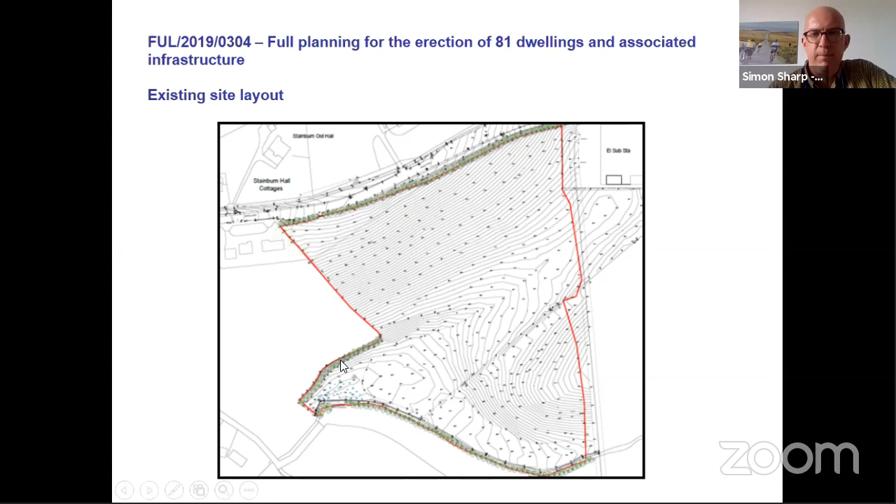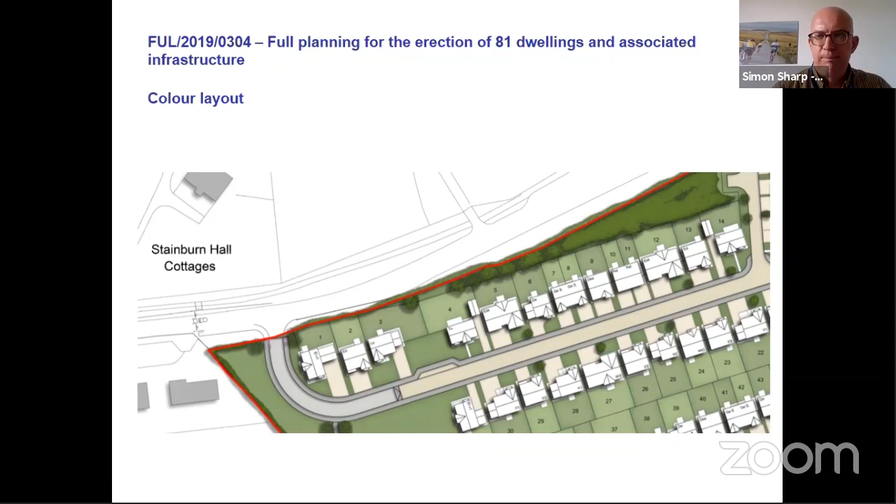I've just zoomed in to the frontage so members can get a better idea of these access arrangements, the vehicular access at the western end of the frontage. And there you can see the hedge and the enhancement of that area, the fillet of further landscaping. You can obviously come back to these slides if members wish at any point during the consideration of the application.

So obviously section 106, the recommendation refers to off-site infrastructure works, quite limited off-site infrastructure works, to enable a 40-mile-an-hour limit to be provided.

This is the hatched area, extending eastwards towards Great Clifton. The one other point members will see from this plan is the green line. It's very faint, but it follows where my cursor is, the visibility splays. These are the visibility splays required to meet the county standards. And of note, because of the curvature of the road and the verge, this means that, with the exception of a small stretch, the vast majority of the frontage hedge will be retained, because the visibility splay quickly comes onto the verge and then out into the roadway itself.

I know members will be familiar, we've had quite a few discussions with regard to the site at Thursby, and also the site last time out at Blencogo, where there was a lot of hedge coming out to enable the visibility splays to be implemented. That's not the case here, so it's materially different to Blencogo in that respect.

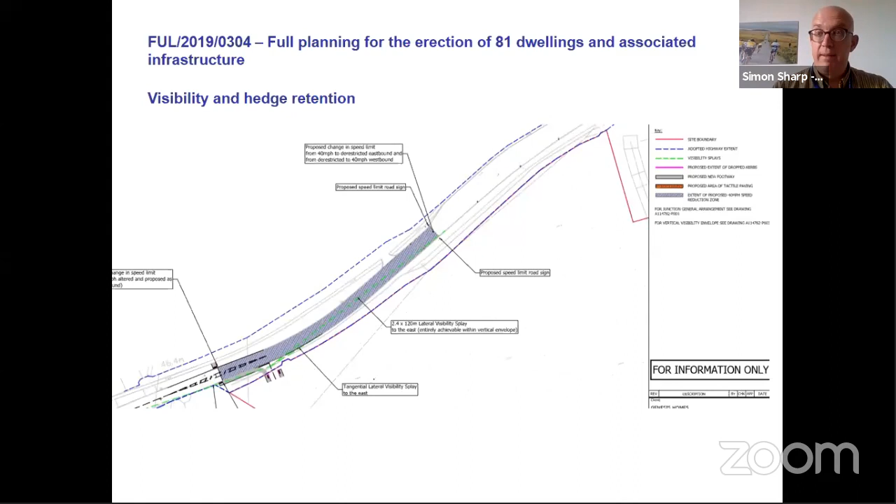I've just zoomed out now just to show the extent of this green, blue hatching, to show the extent of this new 40-mile-an-hour limit along the site frontage. This is the electricity installation to give you some idea of the extent required by the County Highways Authority. And of course, with the 40-mile-an-hour limit in place, that informs the visibility splays required.

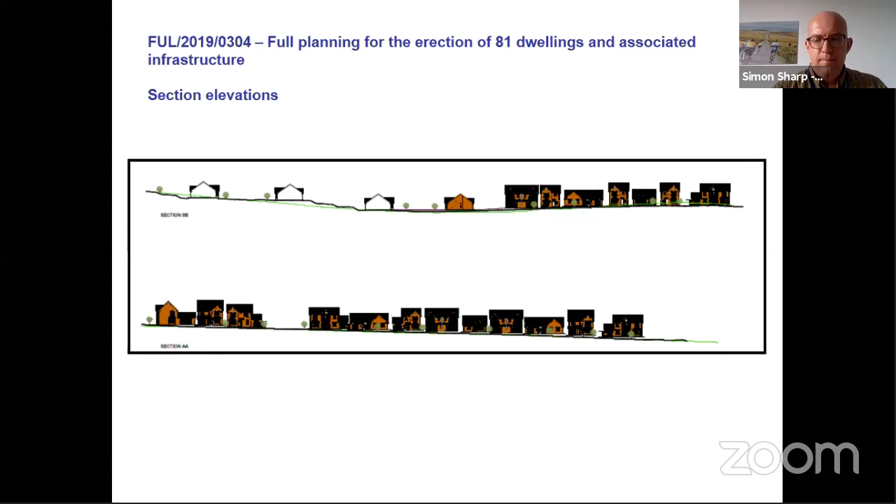You can also see how bungalows are being proposed as well in this plan. We'll zoom in on a section in a moment. So this will give an idea of how those streetscapes will form. You can see how the roof lines are varied, how the eaves lines are varied, how the massing is varied.

So, albeit in plan view, at first sight, you can see where the Town Council's comments about the serried ranks may be coming from. On greater examination, you can actually see what relief is provided by introducing different house types and the topography across the site.

As referred to in the officer's report, there's obviously quite a substantial variety of dwellings being proposed here: 2, 3 and 4 beds, semi-detached, detached, bungalows, two-storey houses. So it's quite a breadth, and that's obviously going to foster quite a balanced and mixed community of different sizes of family households, different age groups, etc., which is obviously good for the sustainability of a development.

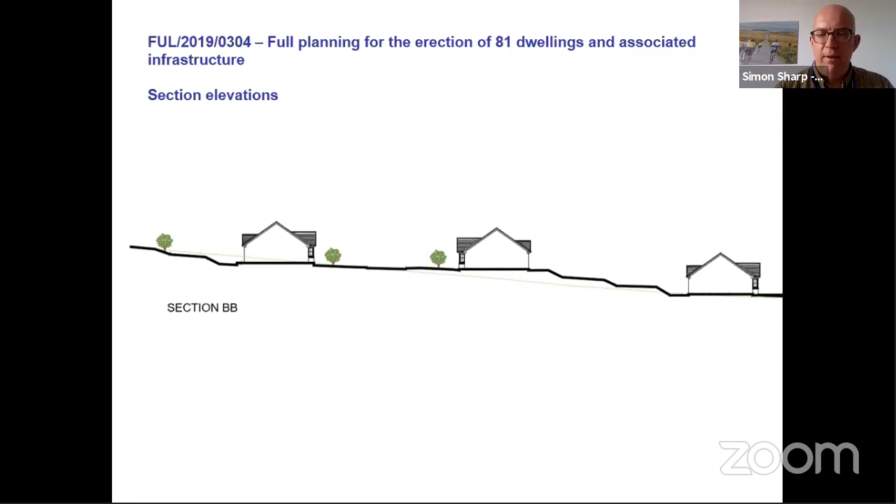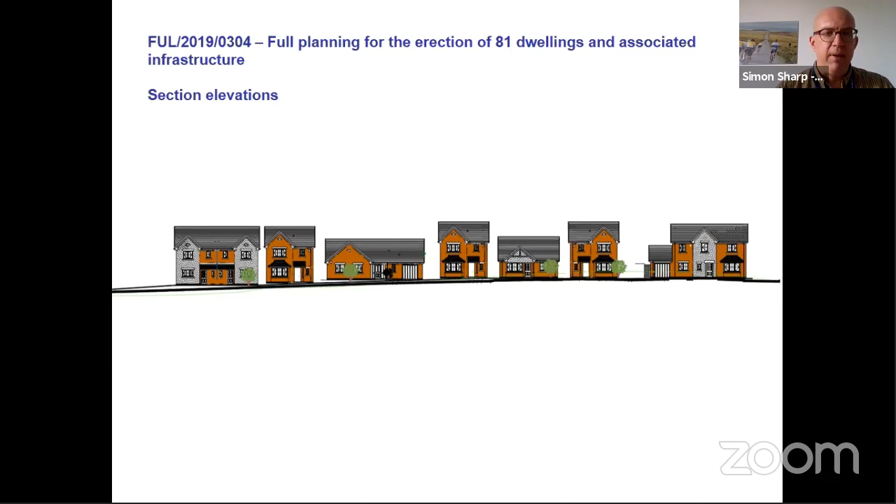And this is another example of how those roofscapes and roof lines vary. So just a canter through the different dwelling types - you can see this is a bungalow. So what we're picking up here is traditional gabled forms.

Now, this is not a modernist development. It's not pushing the architectural boundaries. It's referencing the gabled forms that exist in Stainburn. And as we've referred to in the officer's report, it's quite an eclectic mix of dwelling types and materials in Stainburn. There's render, rough cast render, there's brick, there's stone, there's red brick, there's buff brick.

There's quite an eclectic mix of house styles. There is a particular quality of houses in Stainburn. Members are familiar with Stainburn, particularly the interwar houses that line the main thoroughfare through - classic low density, mature landscaped interwar ribbon development of particular high quality. So there's something really to reference there, and this will obviously become, if it gets granted, a new settlement edge, and you need to think very carefully about how this gateway to Stainburn will appear when coming from the Great Clifton direction.

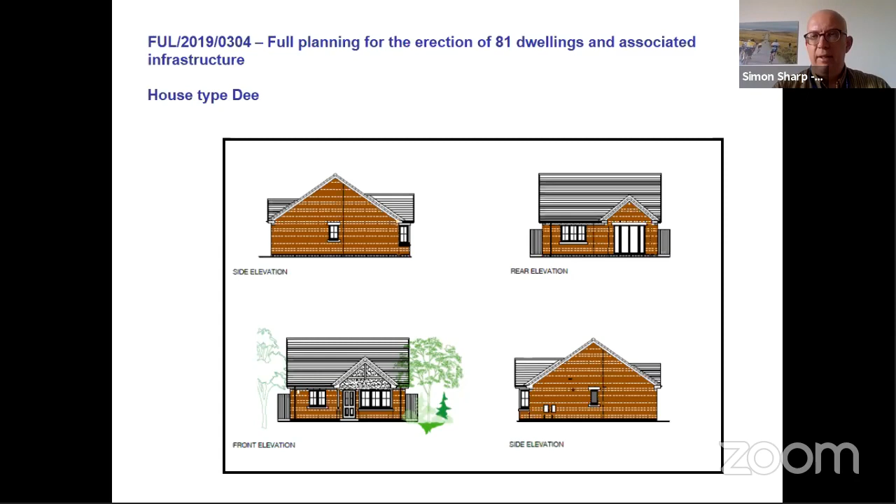So just punching through again, you can see these gabled house type forms, bay windows, canopies, casement windows. You can see variation of materials on some of these dwellings, with a mix of materials.

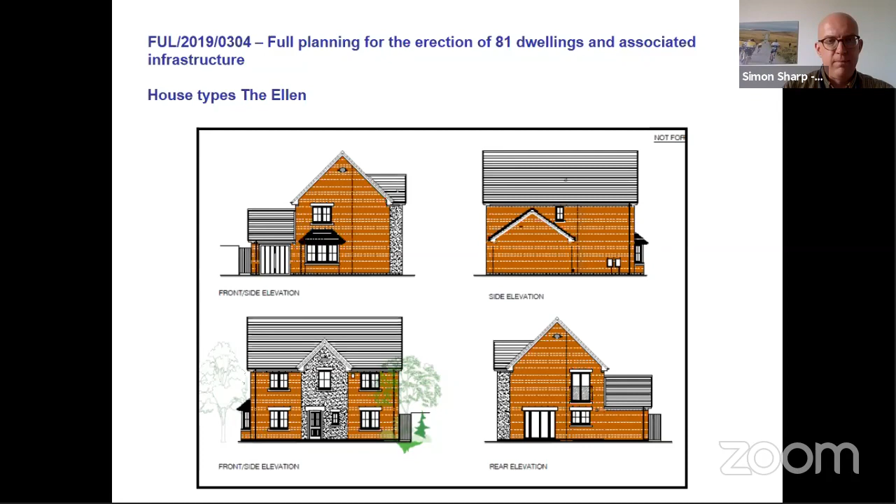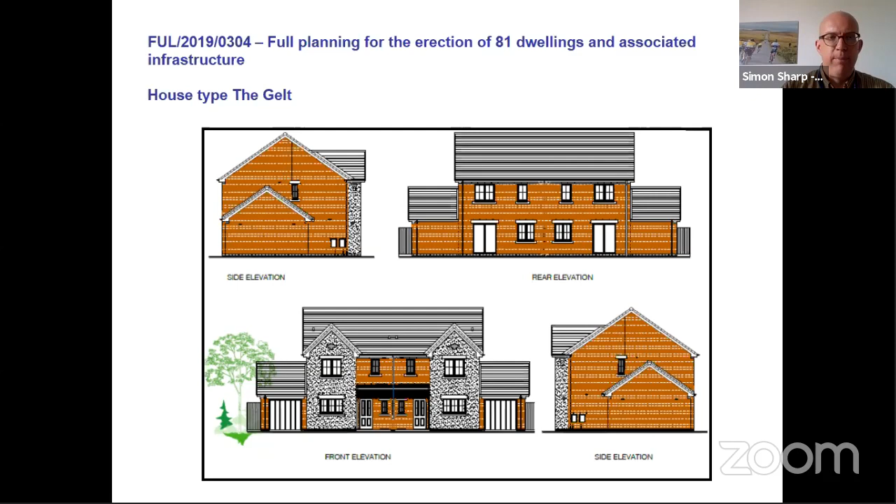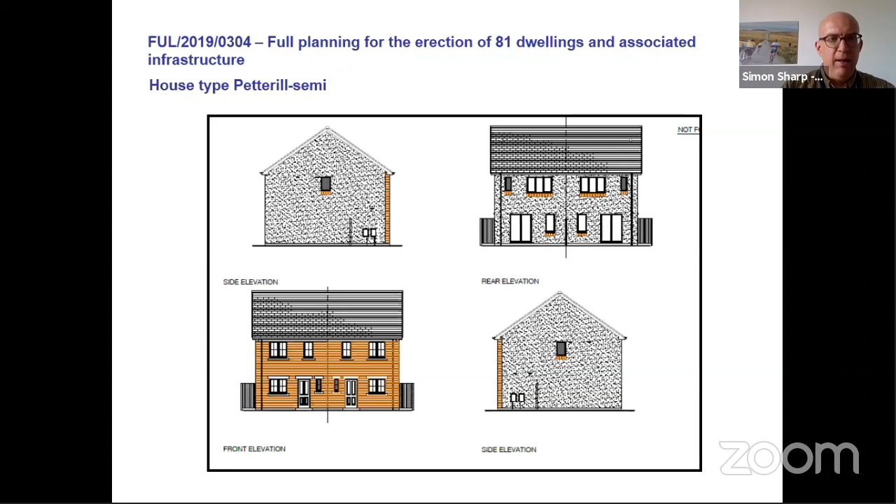Another bungalow type. Semi-detached dwellings, as I referred to - it's not just detached dwellings that are being proposed, so there's the smaller house types. Some have integral garages, some have attached garages. More of the semi-detached houses.

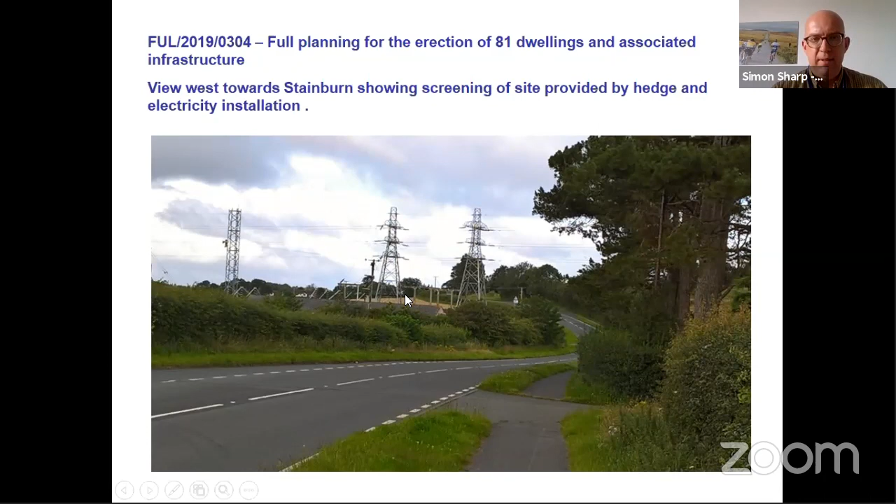That is the site, and there's the site boundary. Obviously, as I say, and we'll see in a moment, the farmers recently saved the hay, and so you'll see that the site is the yellower colour rather than green.

So now the camera's pulled back to the lay-by, which is actually east of the petrol filling station. There's the totem sign of the Clifton petrol filling station. There's the site in the yellow. You can see just there is the electricity substation buildings and paraphernalia, and there on the horizon is the start of the existing settlement of Stainburn.

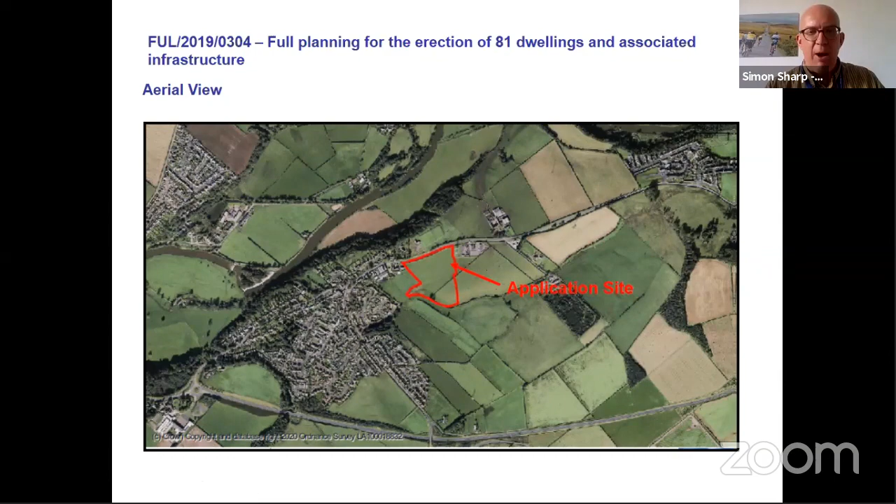You can see how there would be pedestrian linkages that could be forged to connect this part, the application site, to a developed part of the rest of the allocation, leaving the wildlife area in the corridor to continue along this edge. As officers, when we're assessing the site, you can see how that would work, because you can see these undeveloped areas.

This is the rest of the allocation. You can see how this could be developed with this central spine of public open space coming through, accessible from the rest of the allocation and from the application site. You can see how this area, undisturbed wildlife area, could persist. So you can see there's a coherency there.

You might not agree, members - it's a very valid question, and it's something the residents have raised, and it's an important consideration. Residents have every right to raise that point, because the allocation is for 130 dwellings, and the local plan policy envisages 130 dwellings coming forward. So how it knits together is really important. We consider that it does, but obviously those residents disagree, and that's a valid, reasonable opinion to take.

If I can be permitted, Chair, just to digress and talk about the implications of the 130 dwellings - one thing members have to remember is that you did adopt local plan part 2 last week, and things like off-site infrastructure and the impact on Moor Road were considered through the local plan's journey in terms of that highway infrastructure and the requirements. So you just need to bear that in mind.

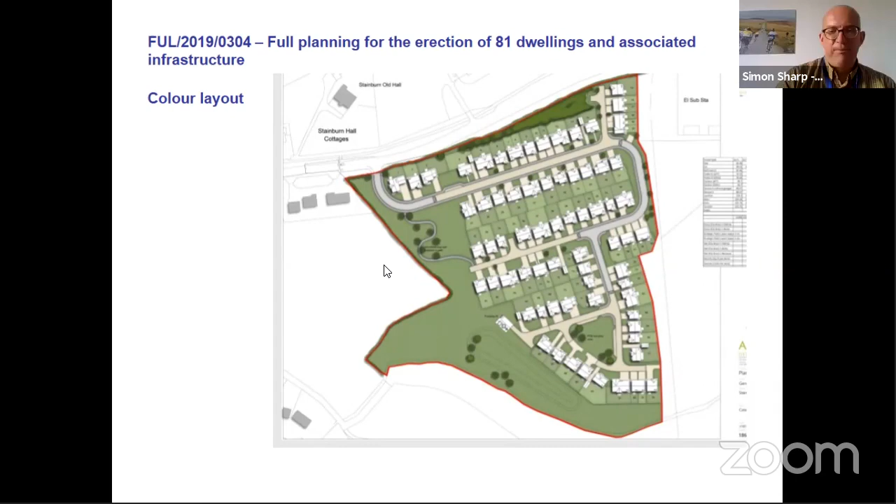I will very briefly, Chair, go through the slides just to remind members where this location is, if technology permits me to do so, which it doesn't by the looks of it. Give me a moment, Simon. I'll put it on mine. Okay, thank you, Lee. I knew with a Windows 7 machine chugging away for this amount of time... just to fill in while Lee's doing it, I have my brand new machine sitting next to me, ready for powering up next time. Members will be pleased to hear this one's finally bitten the dust on the last panel that it's going to be used for.

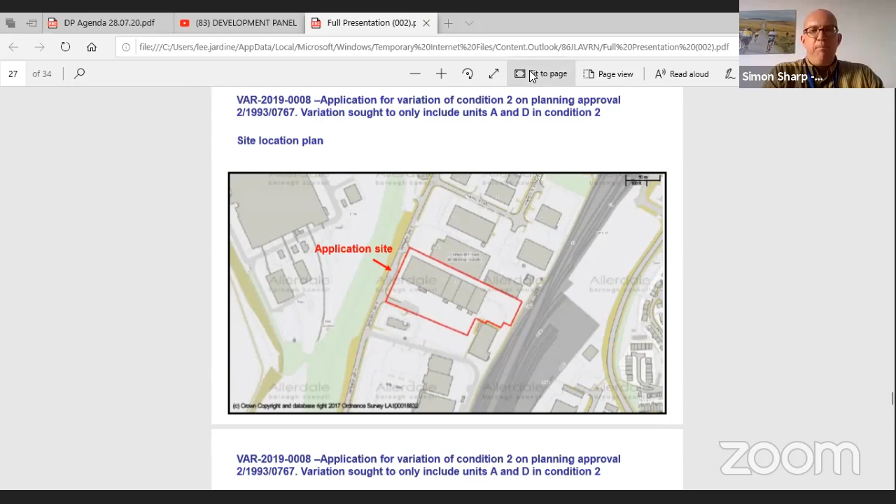Thanks, Lee. So members are familiar, it's an out-of-town retail site, hence the need to go through the sequential test and the retail impact as laid out in the development plan, consistent with the National Planning Policy Framework, hence the necessity in this case to require the Section 106 to safeguard Workington Town Centre. If there was a net addition of the amount proposed, it wouldn't be acceptable, but the applicant is using matters within their control to ensure that isn't the case, as detailed in the recommendation before members.

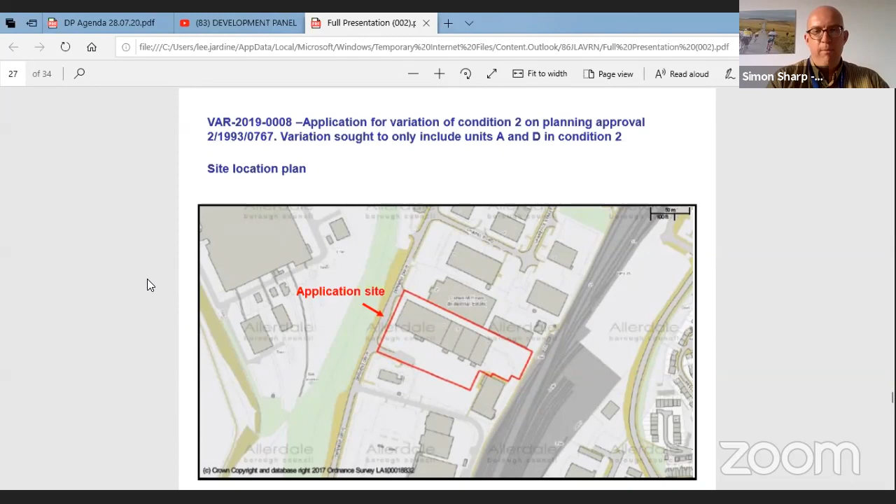So if you want to scroll down, Lee, members may be familiar with the site. There's the normal range of national chains that operate from this area. Members will be familiar with the site. To the south, there's further out-of-town retail, people like Pets at Home, Morrisons, etc. in that area. If you want to scroll down again, Lee.

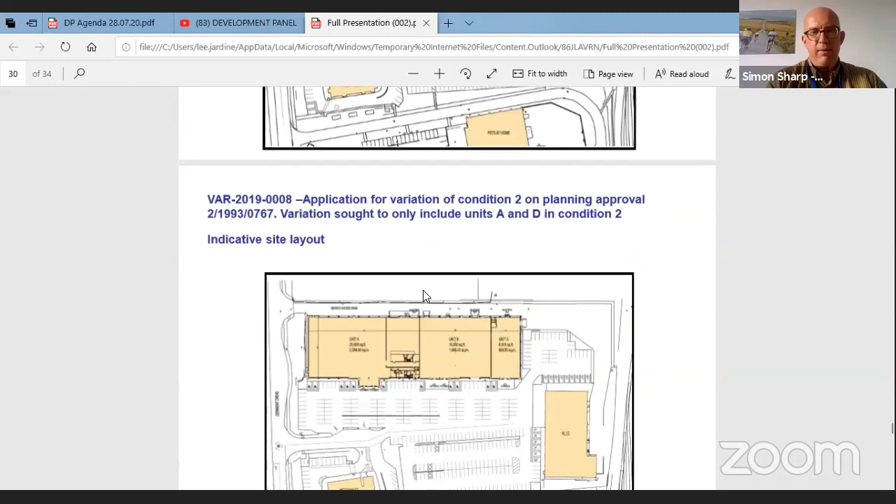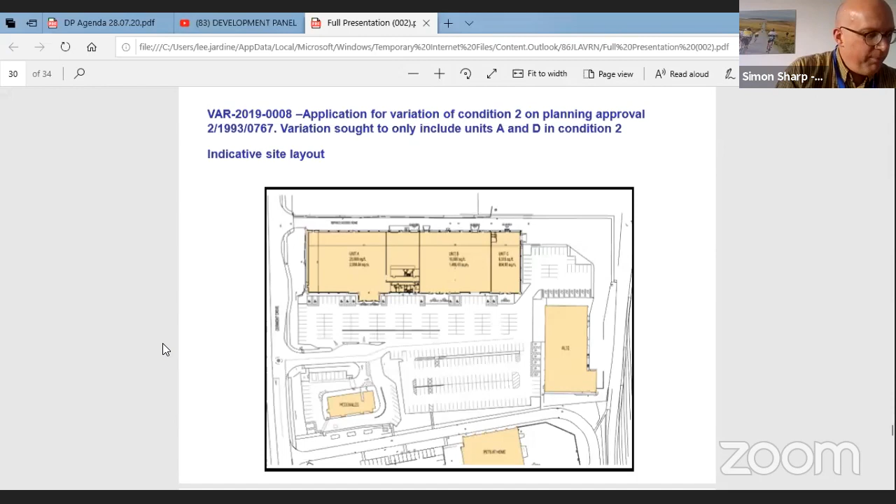So there will be changes in the units. You can see the plan referring to units B and C there towards the centre of that building. And if you scroll down again, Lee, there's an amalgamation into Unit B, which you can see second in from the right there. So that's the unit which is amalgamated. You can see the variation only sought to include units A and D, and the condition refers to the old A and D. Very confusing, but it's clearly detailed in the report, and probably paragraph 2.2 is the best one to refer to. If you want to scroll through again, Lee.

Okay, I think that's fine. It gives members the picture. So there are no late item matters on the list, Chair. So as I say, it's a simple matter about convenience and comparison, floor space, and the need to protect Workington Town Centre's vitality and viability. There's been robust assessment of that.

You can see that there is the site available at the Central Way. Had it not been for the Section 106 proposed, this proposal would not be acceptable. But we have a willing applicant willing to sign up to this Section 106 and ensure that there isn't that net increase in floor space. Thank you, Chair.